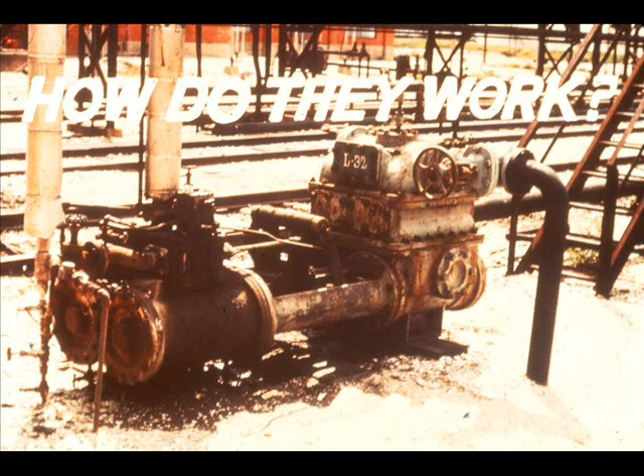You will review the operating principles of positive displacement pumps and how they are classified.

You will learn to recognize the different kinds of rotary pumps from cutaway models, photographs, or sketches, and to describe how these pumps operate.

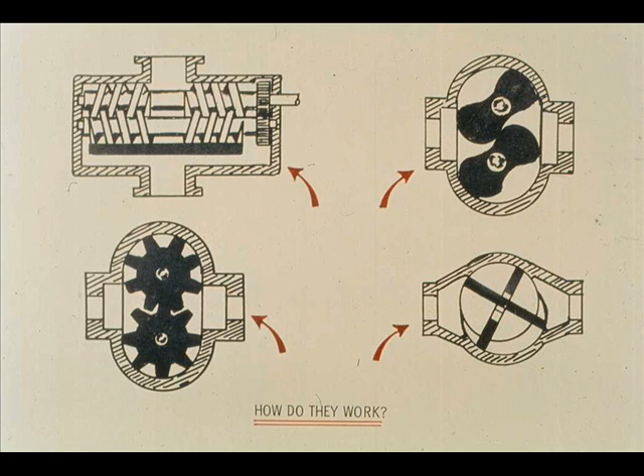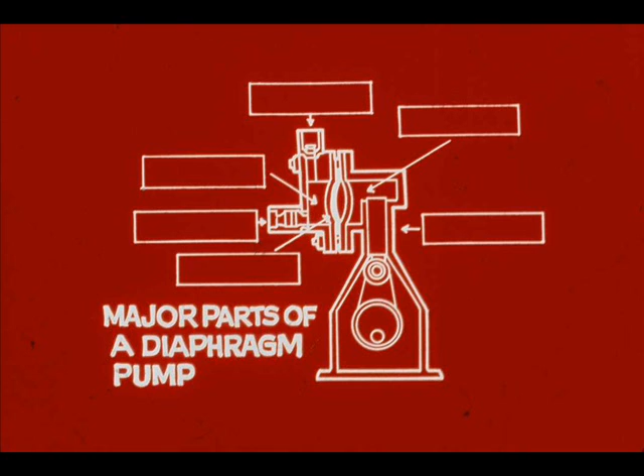From a cutaway model, photograph, or sketch, you will learn to identify the major parts of a diaphragm pump and to tell the functions of these parts.

Diaphragm pumps are especially useful in certain services. You will learn what these services are.

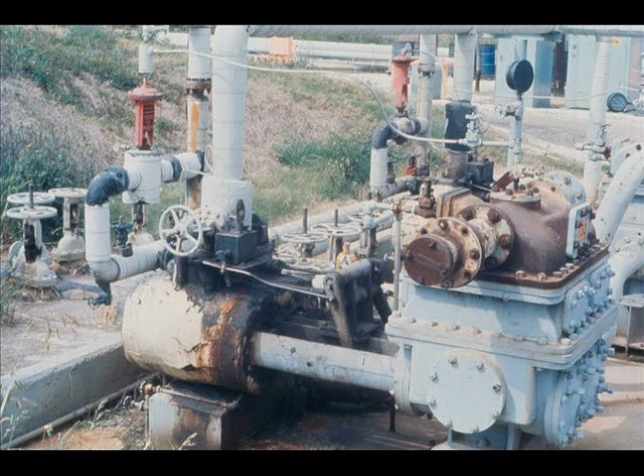You will learn more about steam-driven reciprocating pumps than other types of positive displacement pumps because you're likely to operate more of them.

You will learn to identify the major parts of the steam end, driver of these pumps, to tell how the parts work and how they are lubricated.

You will learn to identify the parts in the power transfer system, how they work, and how they are lubricated.

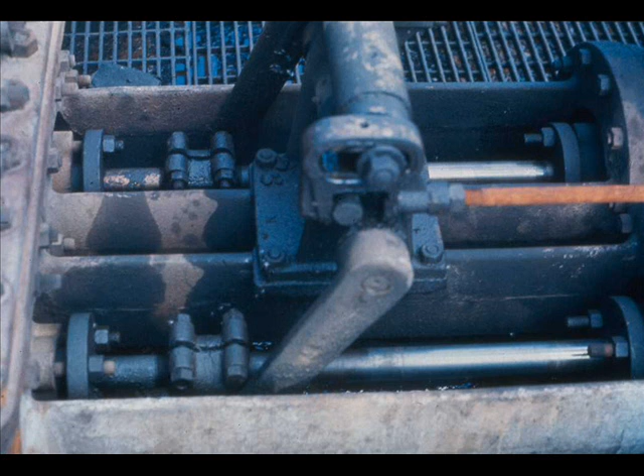The liquid end, the actual pump, has parts corresponding to those of the steam end. You will learn their names, functions, and lubrication.

You will learn that steam-driven reciprocating pumps are classified both by the number of cylinders and by stroke characteristics.

You will learn the meaning of such terms as stroke and revolution, and how pump sizes are stated. And you will learn to use this information in solving problems.

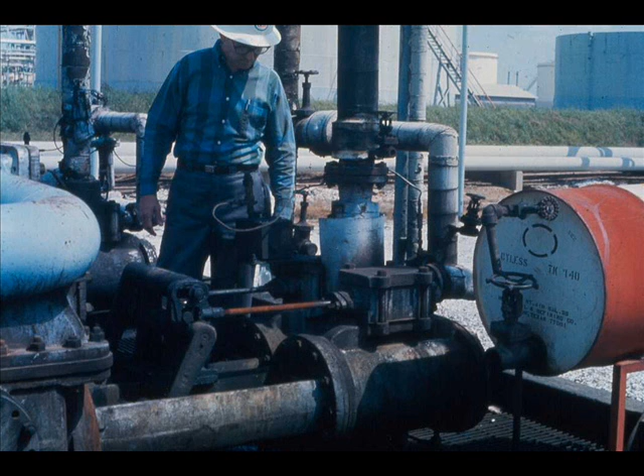You will learn to describe and actually to perform start-up and shut-down operations. And you will learn to troubleshoot steam-driven reciprocating pumps, that is, recognize and correct common operating problems.

You will learn some of these things in class and some in Skills Lab, actual hands-on practice.

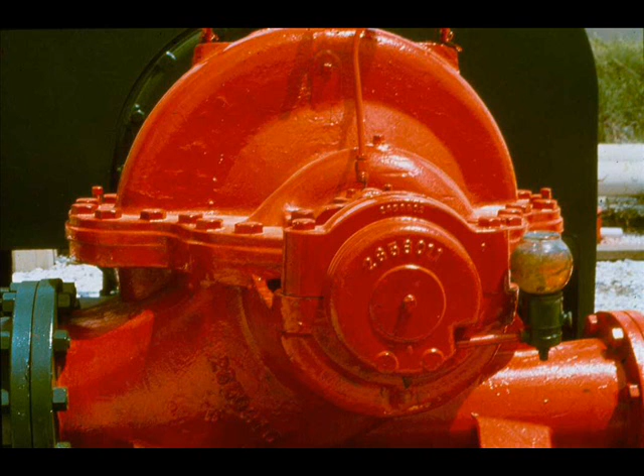You will learn more about centrifugal pumps. You will learn how specific gravity of the liquid being pumped affects pump head and pump horsepower requirements.

You will learn to understand and use such terms as brake horsepower, liquid horsepower, pump efficiency, and pump capacity.

You will learn more about pump characteristic curves, also called pump performance curves, how to develop them, and how to use them.

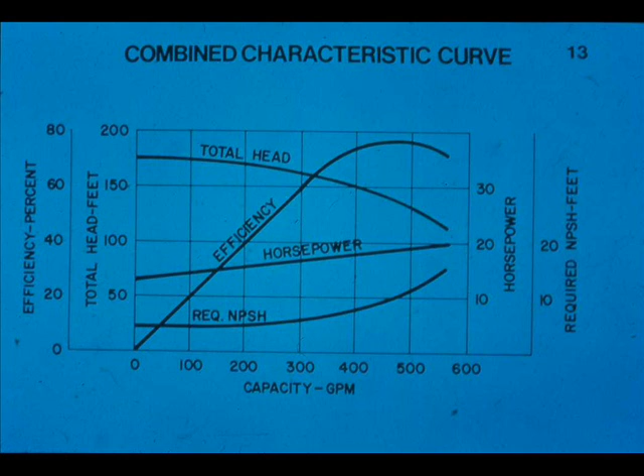You will learn why pumps are sometimes operated in parallel, and sometimes in series.

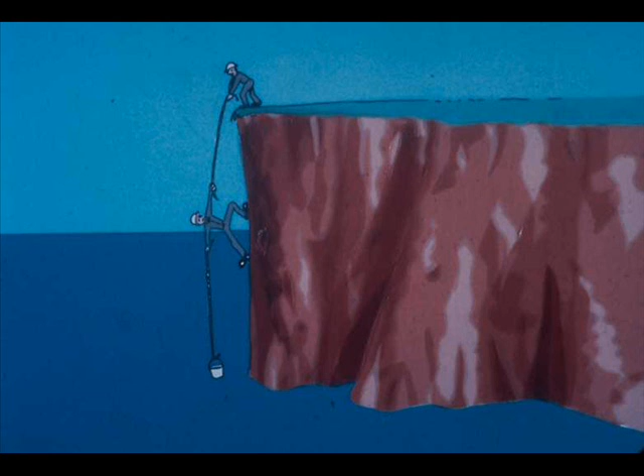You will learn to make certain calculations concerning centrifugal pumps. For example, to calculate liquid horsepower required to pump 100 gallons per minute of water at 200 feet head.

You will learn to describe and actually to perform start-up and shut-down operations. You will learn to troubleshoot centrifugal pumps, that is, recognize and correct common operating problems.

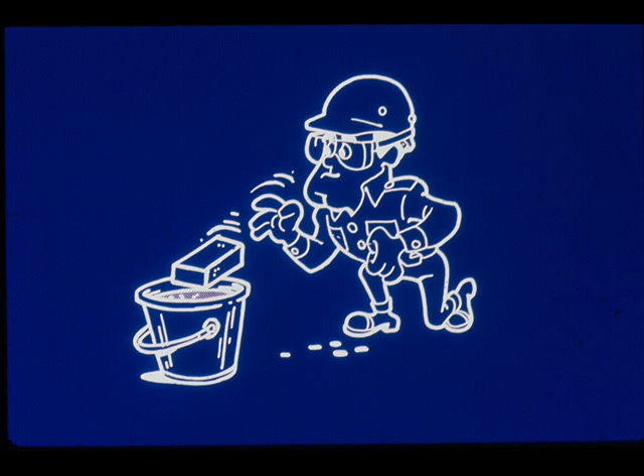Suppose we drop in this brick. The brick reduces the volume the water can occupy, and some of it overflows.

Our brick and bucket are a positive displacement pump. Not very useful, of course, but they illustrate that a positive displacement pump operates by reducing the volume that a liquid can occupy.

Some positive displacement pumps are classified as rotary pumps. A rotary pump's moving parts rotate, and in so doing, reduce the volume the liquid can occupy. Rotary pumps are further classified as gear pumps, screw pumps, lobe pumps, and sliding vane pumps. Let's take a closer look at each of these.

Here is a standard gear type. When the liquid goes in, it occupies a comparatively large volume. But when the gears mesh, they reduce the volume the liquid can occupy and force it out into the discharge line.

Here is an internal gear type. It looks different, but it works the same way as the standard gear type.

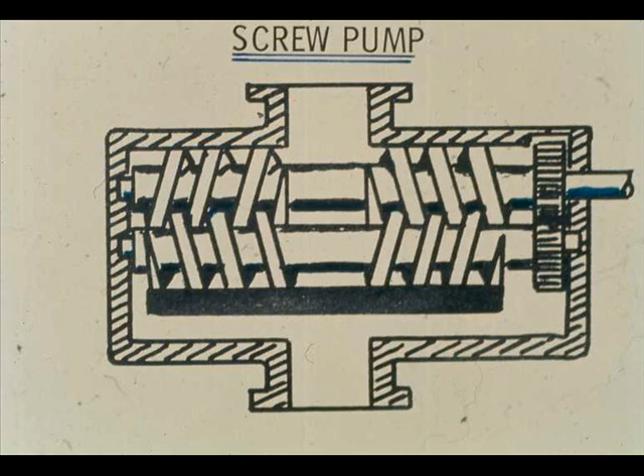In this screw pump also, incoming liquid occupies a comparatively large volume. The rotating screw reduces the volume the liquid can occupy and forces it out into the discharge line.

As the lobes in a lobe pump rotate, they too reduce the volume the liquid can occupy and force it out into the discharge line.

The sliding vane pump works on the same principle. Vanes are mounted on a rotor that is eccentric to the pump casing. As the rotor turns, vanes first slide out to trap a quantity of liquid, then slide in to reduce the volume the liquid can occupy and force it into the discharge line.

Let's look at these rotary pumps again: gear pumps, screw pump, lobe pump, and sliding vane pump.

The diaphragm pump is a special type of positive displacement pump. In it, the flexing of a diaphragm reduces the volume the liquid can occupy.

The diaphragm is flexed by some such device as a cam, lobes, or a plunger. This one has a plunger.

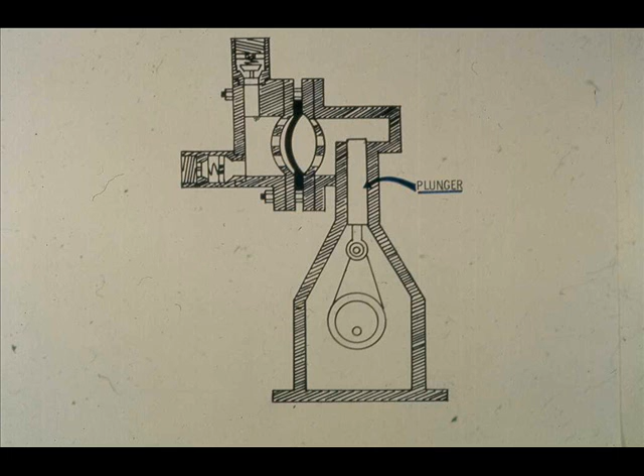When the plunger makes its backstroke, this flexible diaphragm flexes in the same direction, enlarging the hydraulic chamber and creating a vacuum. Suction line pressure forces liquid into the pump.

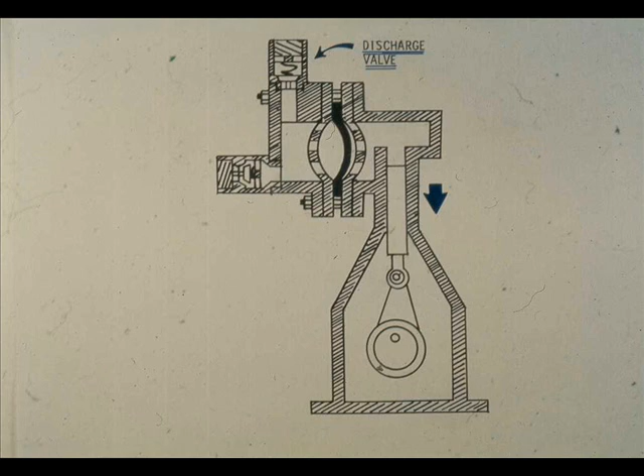Through the suction valve. During the backstroke, discharge line pressure keeps the discharge valve closed.

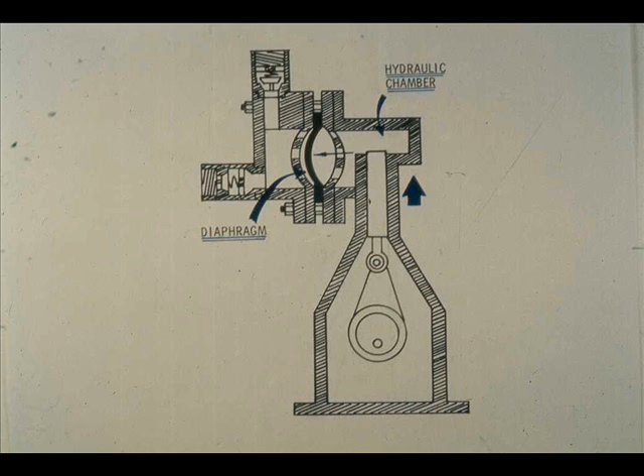The forward stroke of the plunger flexes the diaphragm forward, reducing the volume of the liquid chamber. Pressure closes the suction valve, opens the discharge valve, and forces liquid into the discharge line.

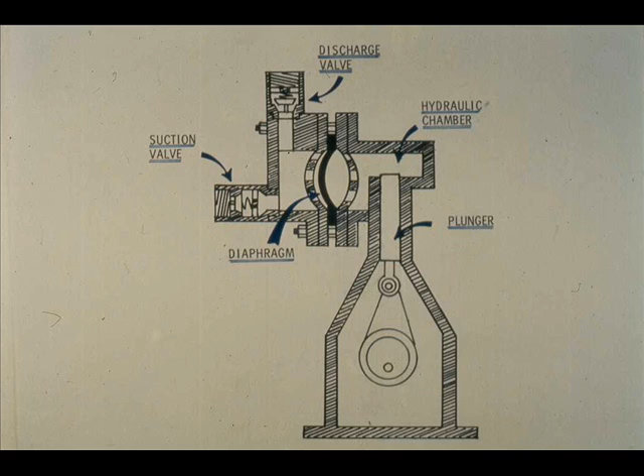Let's look at the major parts again: plunger, diaphragm, hydraulic chamber, suction valve, and discharge valve.

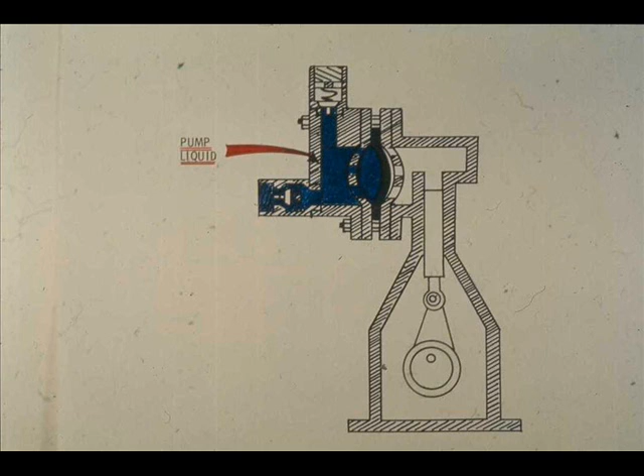Note that the liquid being pumped does not touch any part of the pump that requires lubricating oil. Some liquids must be kept so pure that they cannot stand even minute contamination from traces of lubricating oil.

A diaphragm pump is a good choice for pumping such liquids. A diaphragm pump is also a good choice for pumping corrosive liquids. Liquid does not touch and therefore cannot corrode most of the pump parts.

Only the diaphragm, valves, and liquid chamber need to be protected against corrosion.